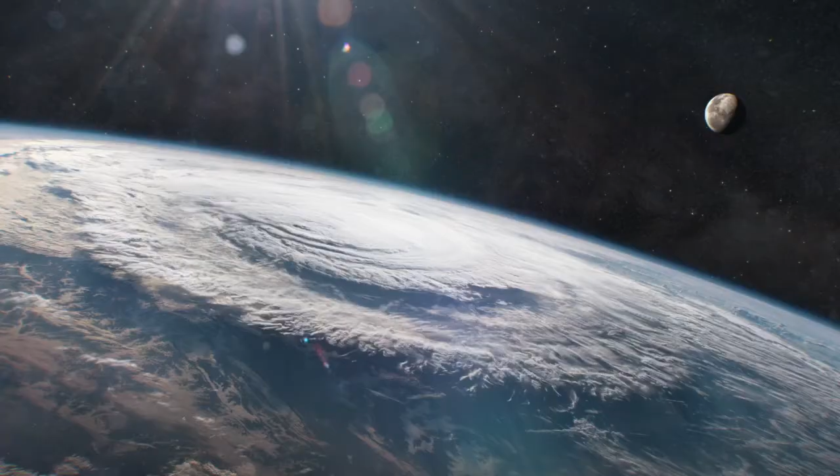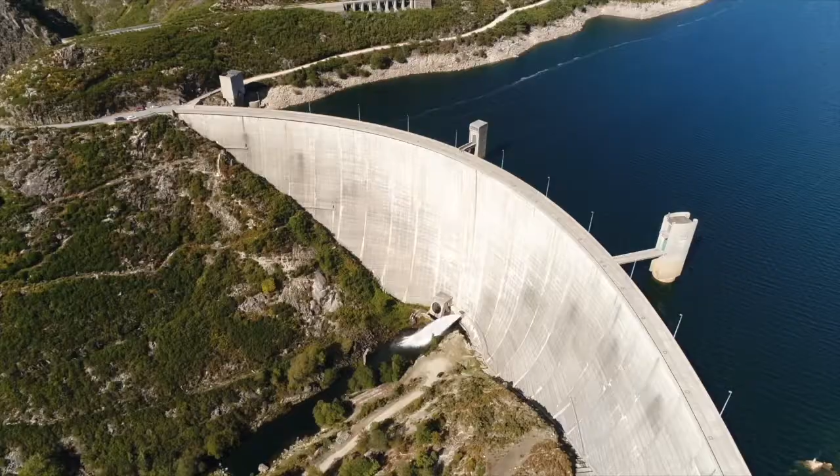The wind has always helped support human life, but also been a force of destruction. The wind from a medium-force hurricane is capable of generating 1.5 terawatts of kinetic energy, equivalent to half of the electricity production we consume on Earth. For this reason, some see hurricanes as a potential source of renewable energy which has not yet been harnessed.

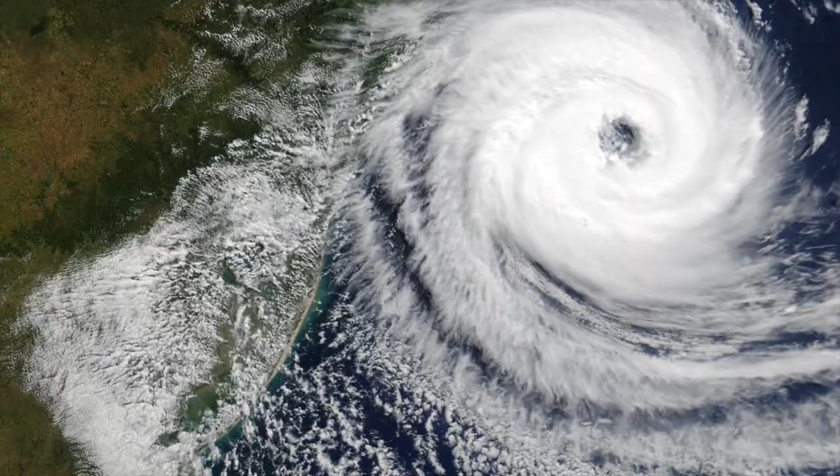But what if instead of trying to capture and store its force, we capture the wind to reproduce the natural phenomenon of a cyclone that can give us light, heat, and energy, and so give us life?

A Spanish company has succeeded by developing a cyclonic conversion generator that takes the energy transformed inside by an artificial mini-cyclone and turning it into a new source of clean and renewable energy that respects the environment and is able to provide us with the electricity we need at a lower price and lower need for investment. A new source of life that will allow us to progress in the fight against climate change. The Yurakan Cyclonic Energy System.

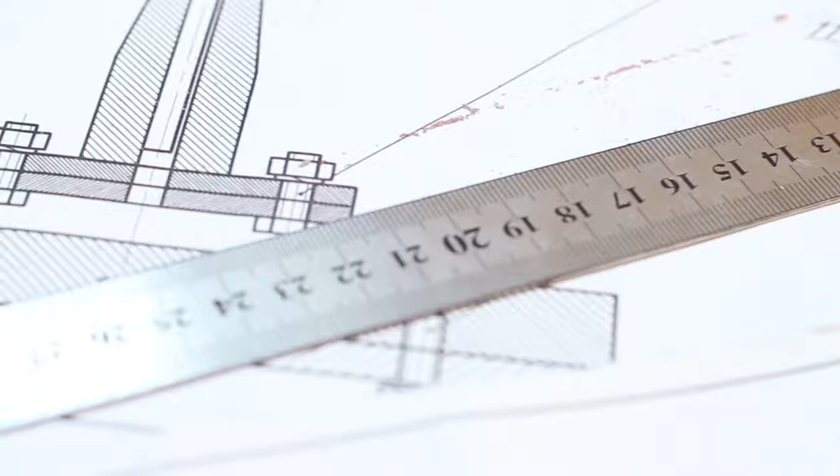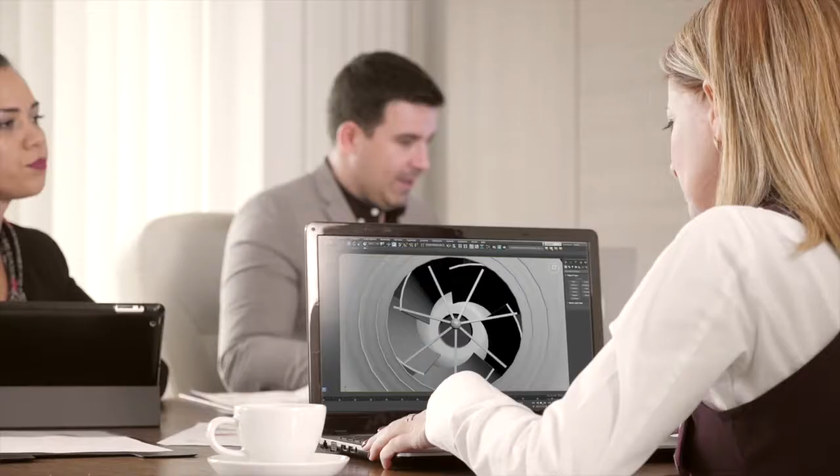A technological milestone endorsed by the European Union, which has considered it a disruptive project in the field of renewable energies, recommending that government bodies, companies, and multinationals invest in its development. This new energy source has already been the subject of experiments for years in wind tunnels at several German universities, working on more than 100 reduced models of generators to test their structure.

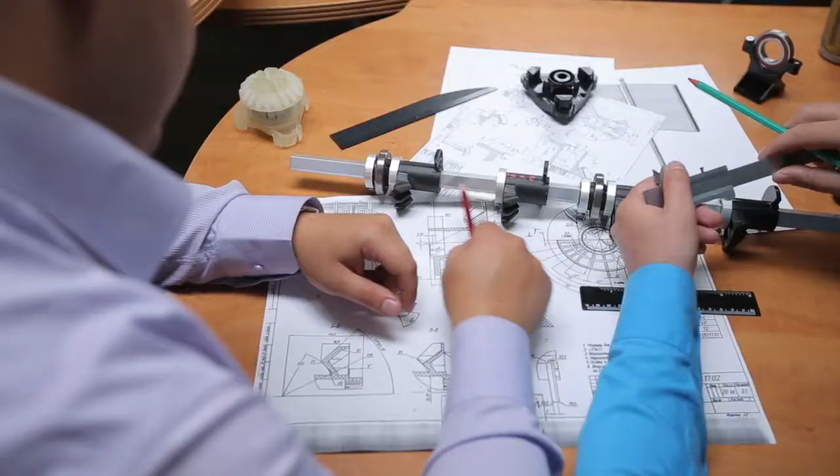On this long journey, more than 450 real-scale three-dimensional simulation models have been carried out, with state-of-the-art software in computational fluid dynamics. These processes and results have already been validated and ratified by the company Analysis DSC and the University of Zaragoza, with which significant improvements have been made in its design to obtain maximum power and extractable energy.

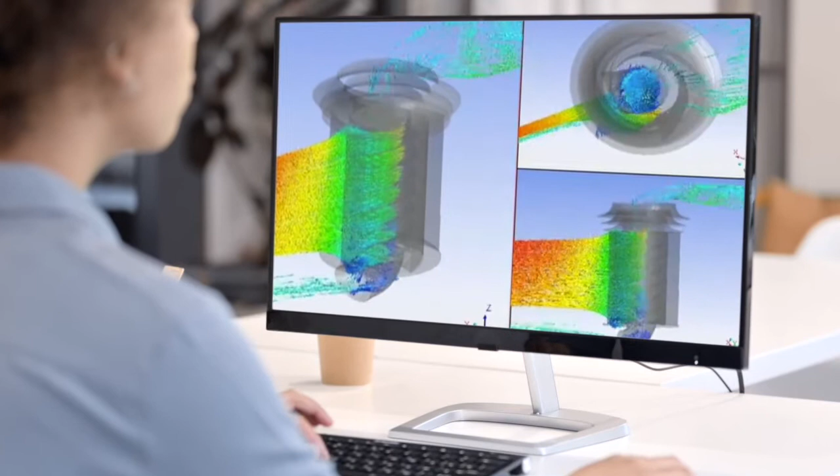Its operation is simple. The exterior wind that hits the structure of the cyclonic conversion generator generates two interdependent rising spiral whirlwinds inside the tower. In turn, the core whirlwind is created by the outer whirlwind at a constant pace and within defined boundaries. The two rising flows create the vortex or mini-cyclone.

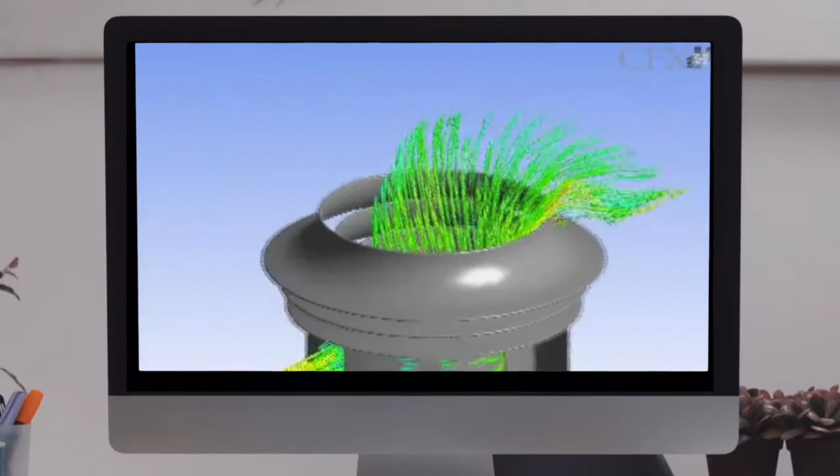This natural phenomenon occurs inside the tower thanks to its convergent aerodynamic convectors, whose shape accelerates the entry of air for the formation of the vortex. In turn, the tower is crowned by a diffuser deflector to prevent the rupture of the vortex, producing a Venturi effect on the mini-cyclone created. These two flows are the power generators.

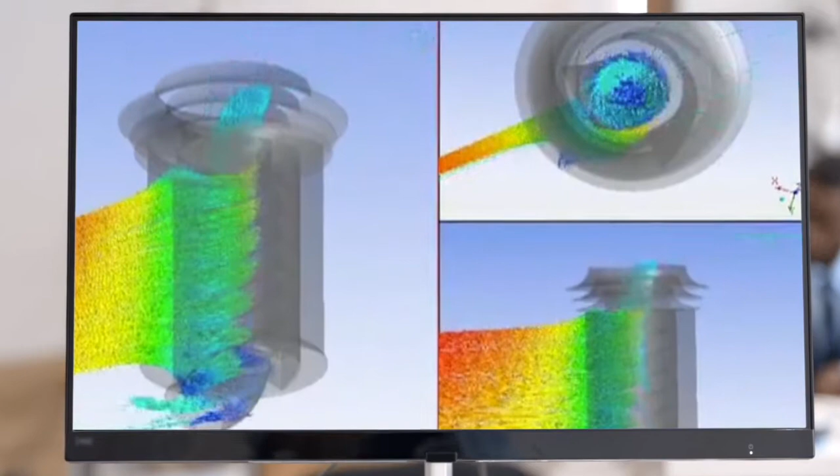A primary flow generates kinetic energy from the exterior wind, which it integrates, concentrates, and accelerates as it rotates inside the tower. And a secondary flow, in addition to kinetics, can take advantage of the convective thermal energy generated in its interior by temperature differences.

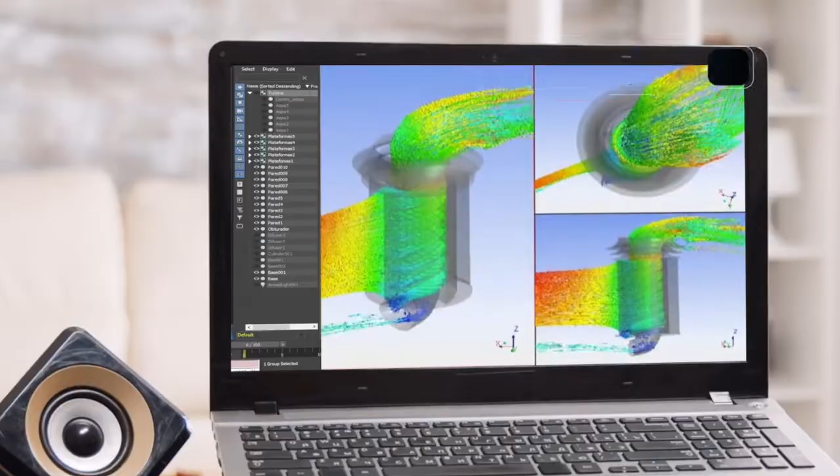This artificial mini-cyclone, confined and with no possibility of escape, compresses the air on a vertical axis tubed wind turbine acting as a pressure generator. The process results in greater stability and power in the production of electrical energy compared to other renewable energy sources.

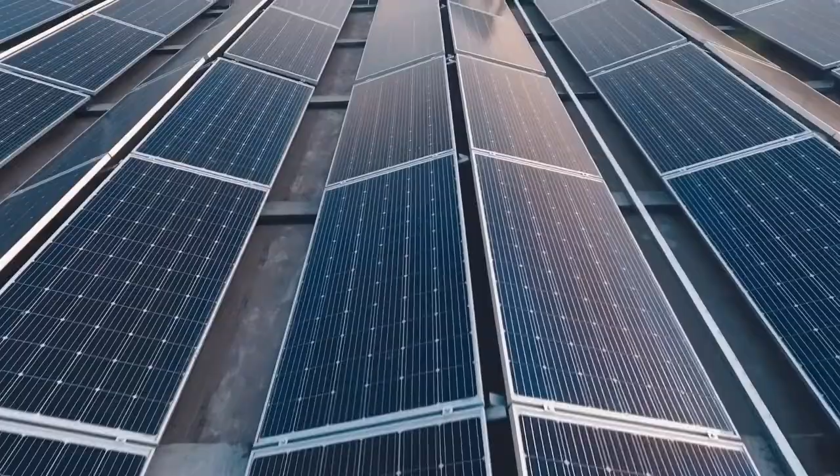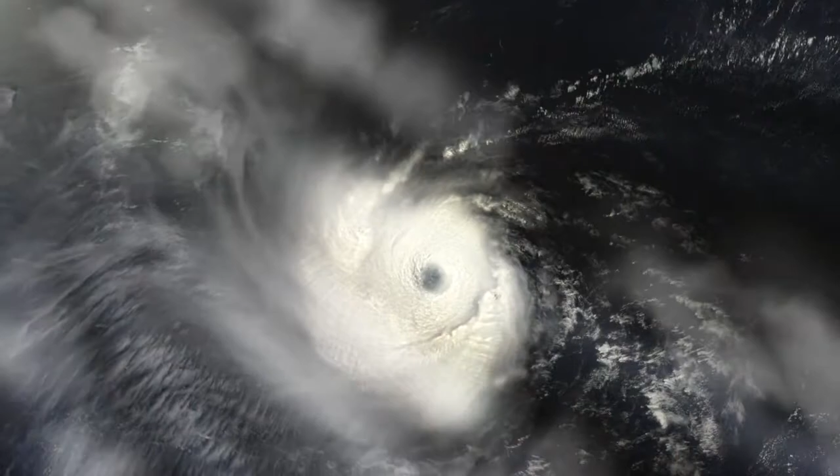Its advantages: it does not produce turbulence, only a shadow effect, so the cyclone towers can be much closer to each other. Thus, a cyclone generator park occupies a much smaller surface area than a conventional wind farm, obtaining in turn higher energy production. Furthermore, when the vortex is created with a very high moment of inertia, the fluctuating air inlets are stabilized without affecting the operation of the wind turbine, making production more efficient.

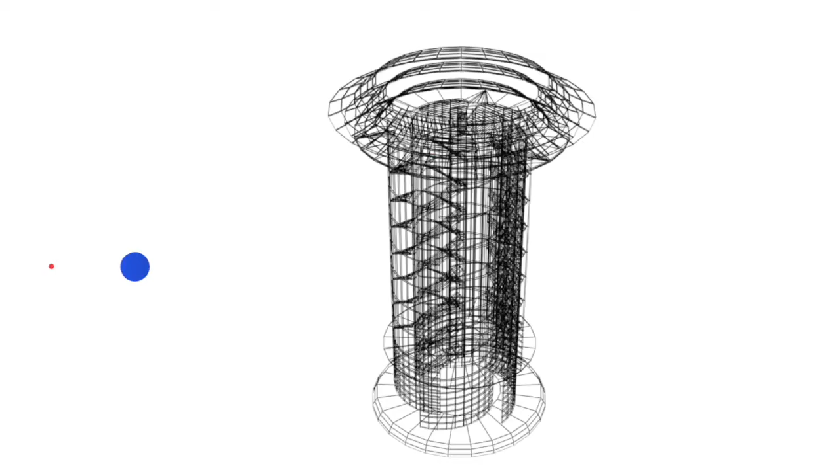Thus, the cyclonic generator captures, concentrates, and integrates other types of energy dispersed in the environment. All of this makes cyclonic energy a reality, becoming a much more efficient and profitable alternative source. A single cyclonic tower is capable of generating greater energy production, and we are able to adapt its size to our energy needs, limiting the environmental impact caused by other renewable sources on the fauna and the environment.

The cyclone generator tube turbine, with blades 3 or 4 times shorter than horizontal axis wind turbines, achieves higher efficiency in energy production compared to free turbines used by wind farms onshore and offshore. Furthermore, as the structure of the tower is made of reinforced concrete, its construction does not present a challenge.

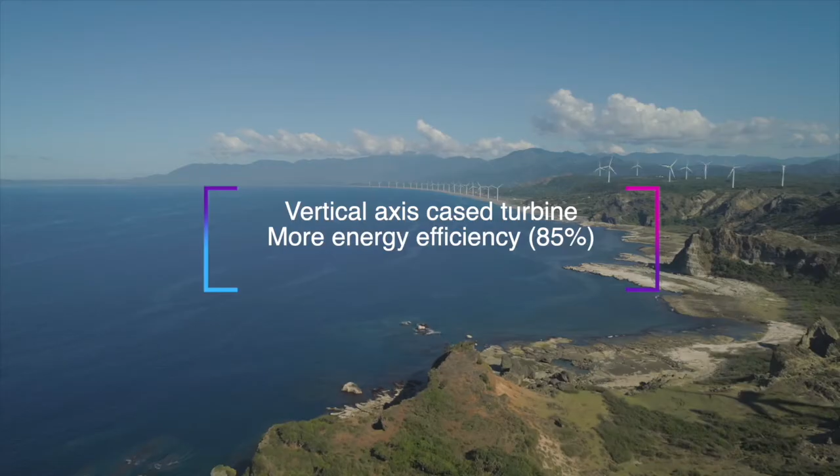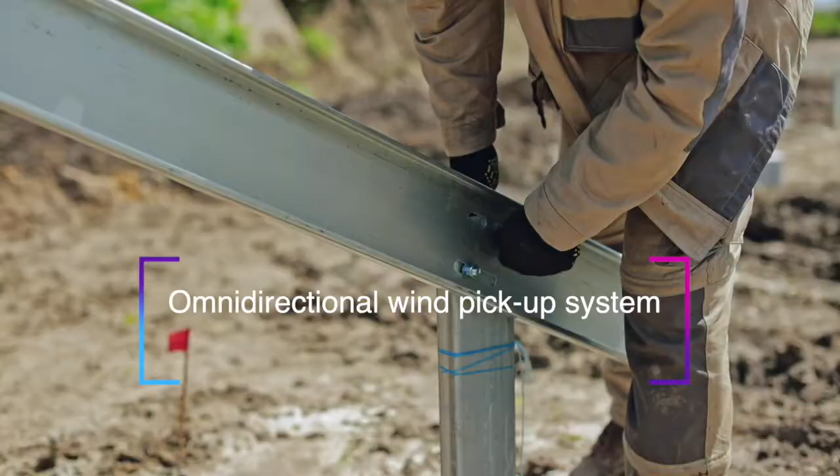It is not affected by gusts, turbulence, or changes in wind direction, and operates in a wide range of wind speeds. With an average lifespan of 100 years, its installation, regulation, and control are simpler and less expensive, reducing maintenance costs compared to other energy sources, as the turbine and multipolar generator are protected inside.

All these advantages make the Yurakan cyclonic energy source the best alternative to give us the energy we need to fight against climate change. Yurakan, the energy that is born from nature. The power of the sun and the wind in your hands.